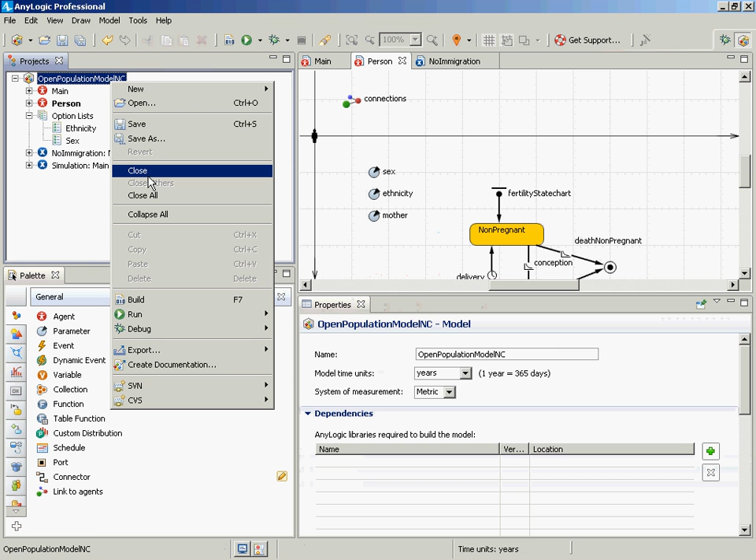Thank you for the question. If you go in here to the population, and look at the population statistics we've defined down here, those would apply only to people who are still in the population. If we wanted statistics that apply to everyone who ever existed, we would need to be more careful and walk over, collecting all the ancestry information. That's much rarer in my opinion, but it can be done.

You could return the reference to the mother and then- Oh, totally, exactly. You could walk the current population and go back and find their mothers and their mother's mother, and elicit the information that way. It wouldn't be very hard to do, but you'd want to be conscious that this is really what I want to do. By default, you're computing your statistics on the current population, and I think that matches 95% or more of the needs out there. You should be aware that if you're having these references intergeneration, unless you null them out when someone dies, they're going to be maintained even after death. Is that helpful? Yeah, okay.

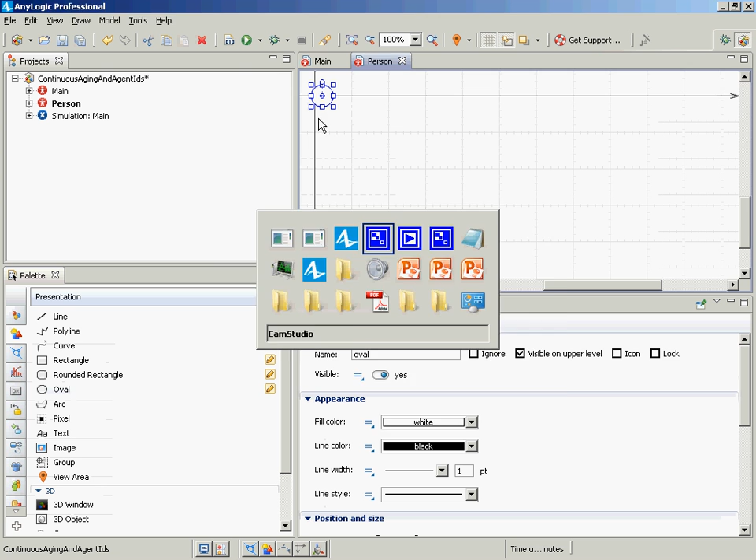I checked the model. All of the dead people are marked as root.population -1. Why don't we have -2, -3, -4? Oh, it's just a default designation. They're no longer in the population. How can we distinguish between dead people? Via the mechanism I'm about to show you.

They're so you're going to assign an ID. You could also test: is my mother the same as your mother? Even though they both have -1, we could test if they're equal to each other. But this will be assigning IDs, which will give them a unique ID that will be persistent. However long they're remembered, they'll have an ID, which is, I think, typically what we want.

And is it related to the memory that we assign to each person? For example, if it goes out of memory, is it going to delete it? Not unless those people would be eliminated. You would never see a reference to person minus one unless you're maintaining this connection, like we have a mother parameter, or a mother variable. That's when you'll see this, because the person's gone from the population. Normally, if people leave the population, you're not going to see any reference to them anymore.

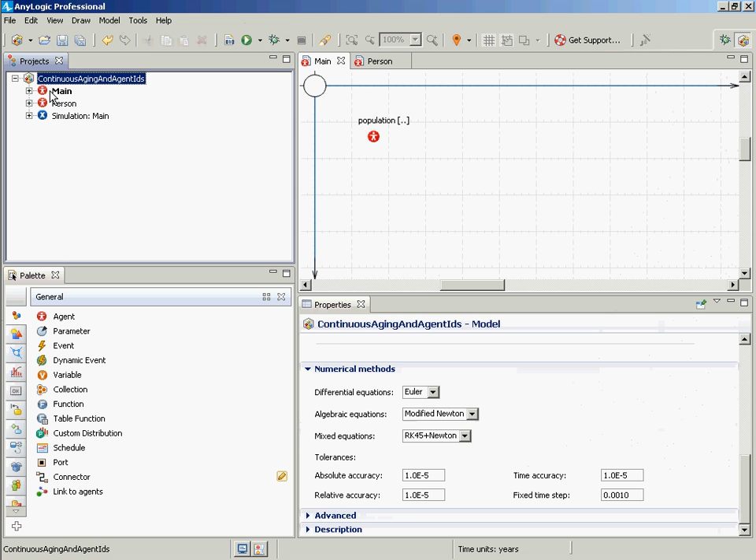So I think you were in here and you clicked this. Now it's working. You've got to be careful with this one, because sometimes it's not going to run the scenario you want. It could be that it didn't have any run recorded in there. If this is the first time you've run this model, it probably doesn't know what you want to run, because this is for running things as you've run them recently.

I would do this. I rarely use that button because it's confusing which one it's going to run. I think that's exactly what happened. So in any case, it seems a problem with knowing what to run and build rather than the model. Okay. So this is continuous age, folks. People are growing over age, and just to be clear about this.

Well, we'll take advantage of this more in some other models we may see. But suppose we were to want to add a state chart to someone where we wanted to have their mortality risk vary with age in a continuous fashion. We could have a state chart, mortality, right? Or state chart. It's not really mortality. It's state chart.

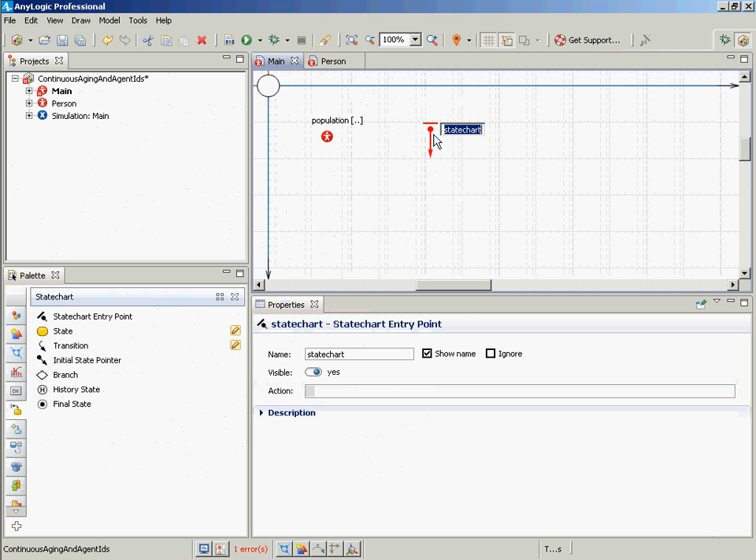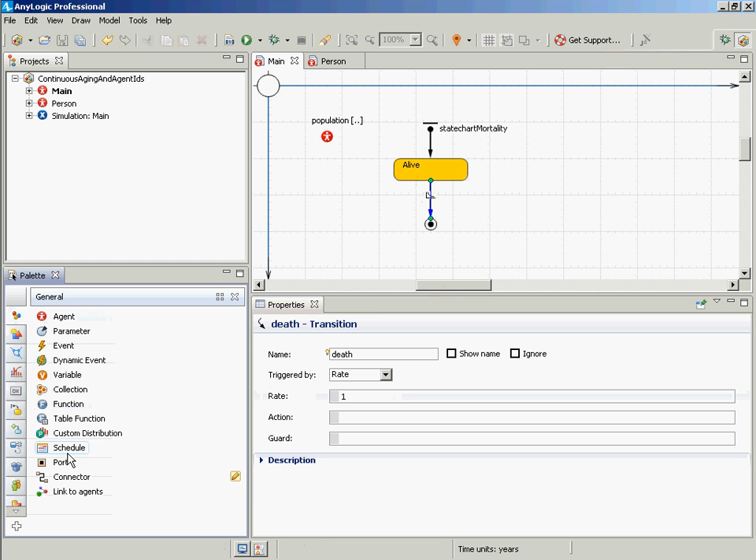Sort of life course, and this is alive, and then at some point there's a death transition, and here they have this continuous age, and we could define, if we wanted to do so, a so-called table function. This is a very useful thing. We're going to set this death transition to be a rate, and we're going to set the rate, the so-called hazard, the chance of dying, to be according to a table function based on their current age. So this would be mortality hazard, as we call it, the chance per year that someone will die, and we could define this in any number of different ways.

In this case, maybe for the youngest years in life, we have a 1 out of 1,000 chance per year of death, but then that actually lowers by age 1 because it's really the earliest years, and then maybe by age 10 it's also very, very small, and then by age 20 it rises. Think of those rambunctious years. By 35 it's gone down again. And maybe it remains down until 50 when it starts nudging up again, and then it works up its way till 70 maybe. I'm picking somewhat arbitrary values, but the idea is that we can have this mortality hazard, and it actually will graph it out for us here.

And this mortality hazard, we have all sorts of ways we could tell it. How do you interpolate it? Do you interpret it as sort of stepped values, or do you linearly interpolate it, or do you use a spline-based method, which has some nice theory behind it, and does a smoother interpolation according to polynomial fit? And then you say, how do I handle out of range things? Do I just use the nearest value? Do I extrapolate? Do I use some sort of custom strategy, treat it as an error?

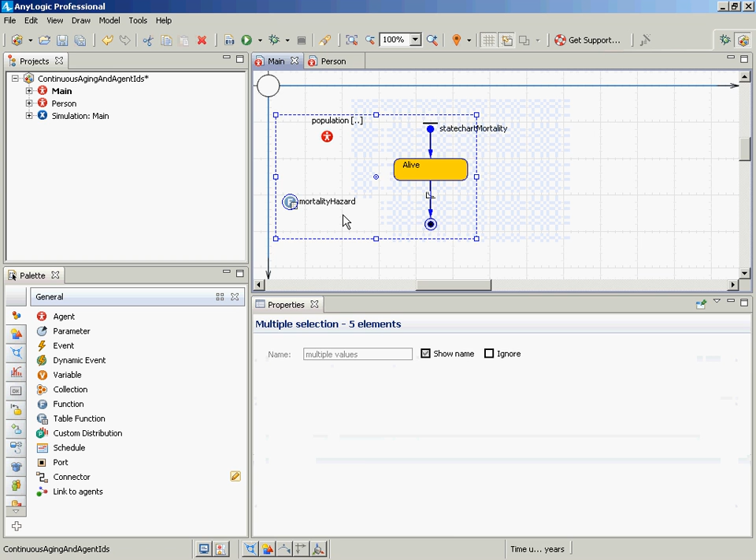Did I do a rookie mistake? I feel sorry. You know where I put these things? I put them in Main. They belong in Person. Sorry, folks. I just cut and I just paste them. What the heck? I was wondering what is going on here. Okay, so there we go.

The mortality hazard, well, that's a good question. Does that belong? It's not a parameter, so it causes less trouble than a parameter. With parameters, there's several reasons to put them in Main as opposed to Person. And I still vacillate as to where to put a given one. One of the arguments for putting a parameter in Main is if it doesn't differ between people, but that's just one of many. Another argument is that then you can set it from experiments. Another reason is you don't have to specify it every time you add someone to the population. And mortality hazard certainly is something shared between people, so that might suggest putting it in Main.

On the other hand, you don't have to worry about specifying it when you're adding people to the population, and it's something which causes in general less awkwardness if we keep it in Person. So I would tend to keep it together with Person. We also don't have to worry about specifying it from experiment. So in my view, it kind of belongs best with the person because it's about the person, or it's about people. You notice that you can set mortality hazard.

And they're growing older and older, but they're not being updated with the newer mortality hazards. So as they're aging, their chance of mortality is supposed to be rising, but it's not right now. Oh great, I left AnyLogic here. So it's not rising, and the reason is when they enter that state, that's when the mortality is determined for them, and nothing tells them something has changed at that point, that something has modified, recompute mortality.

If everyone started with age 0, no one would die at all because the mortality hazard is 0 for that, as in my latest update. So when they come in, their mortality hazard is determined and it's not being recomputed. If we wish it to be recomputed, we can do so by setting a transition that leaves this state and comes back in, and I'll go implement that. I'm going to double click on this here, and then drag it down here. Here we go.

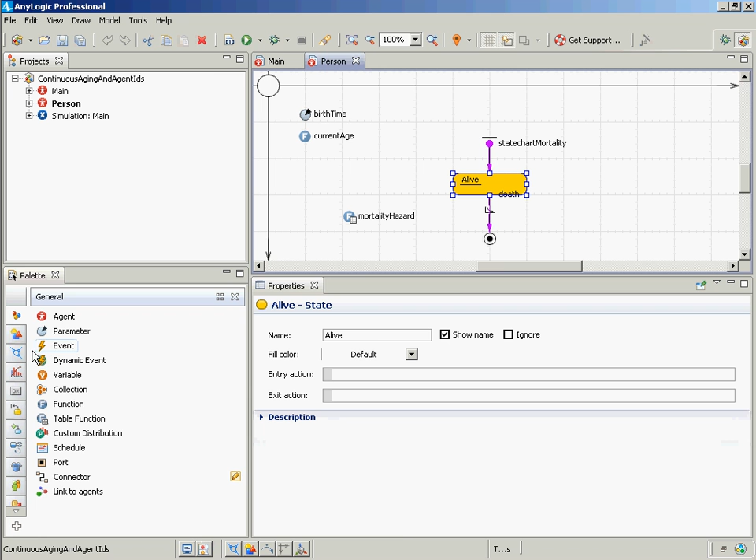We're going to set this to be going off at a timeout. Every 1 year, it'll recompute the mortality hazard, for example. So this would be called recompute mortality hazard. Okay, so even though continuous aging is going on, even though people have double precision age, and at any one time we may read the age off for someone in a continuous fashion, the mortality hazard is only being computed over time, being updated every year. So it's being updated once a year.

Okay. Oh, we didn't remove someone from the population when they die, so let's go do that. So in this death state, this final state, how can I remove the person from the population? Give me the formula. We just did this. Main dot remove_population. Okay. It's in the action associated. Oh, I'm doing it with the transition. I meant to do it with this state here. It's the action associated with the state. With this state down here. Okay. Remove population.

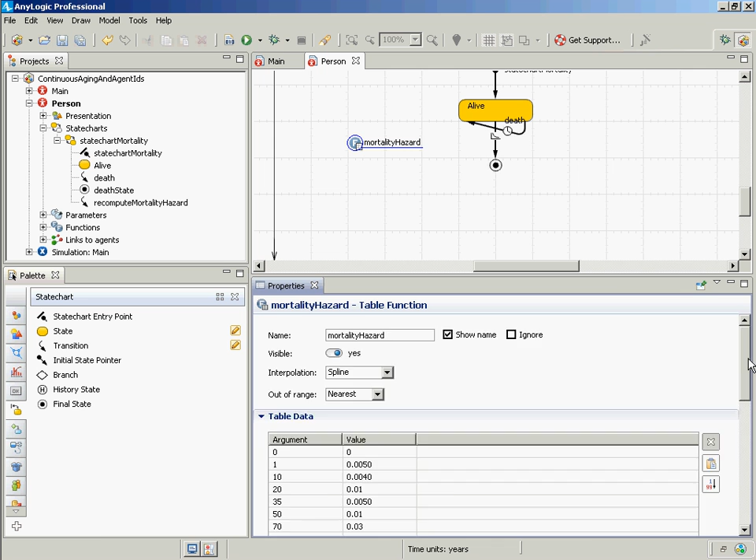Recompute their mortality hazard? It's a good question, but the question was, do you have to get it to first recompute their age and then the mortality hazard? This is the formula, the rate formula for this exit transition, this transition for mortality. And by coming back into this state, the rates and conditions associated with any transitions leaving this state will be recomputed, okay? When you come back into the state, those rates are recomputed. This is the formula for the rate. So it will call current age, get their current age, and it will apply the mortality hazard table function to look up for that age what's their risk of death per year. And it will then use that.

The update of the mortality hazard is only happening in the other transition. So why would it... Okay, so it's not named there, but this transition here that's shown looping back to alive leaves the state and comes back in. And it's when you come into a state that it's recomputing the rates for all of the transitions that leave that state. And so the rates specified for any transition which leave alive will be recomputed at that time, including this one that says death, this one that's highlighted here. And its rate will be given by this formula, and that formula is reevaluated at that time, okay? So it's recomputing it.

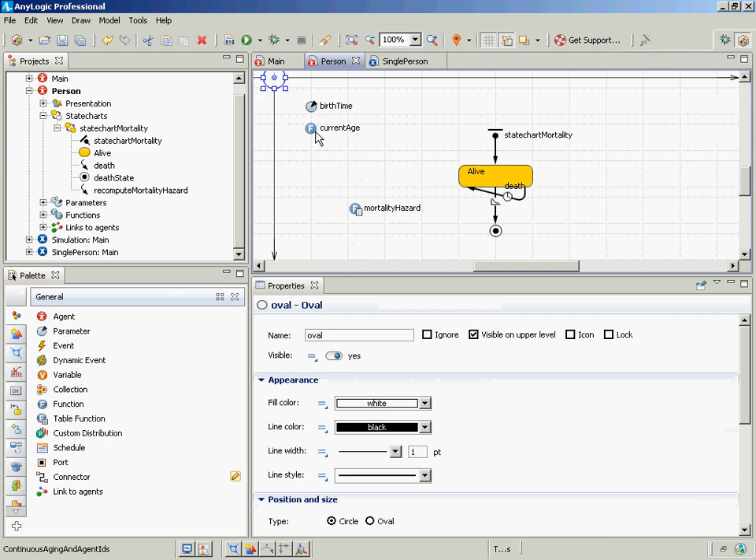This actually wouldn't be that helpful, but it'll illustrate the point. It's usually being called. Okay, it's being called over time at these times. Those times exactly.

Now, if I wanted to find out when this particular expression was being called, I could use a similar principle. I could actually have it call a function, and the function will return this thing, and it will further print out that information, right?

So why don't I say, I'm going to create a function called compute mortality hazard, and this is going to be a function. So in this transition, I could have something called compute mortality hazard. This is going to be a function, compute mortality hazard. It's going to return a value, which is a double.

And I'm going to call it from here. Hazard. Yeah. And it's going to return a double.

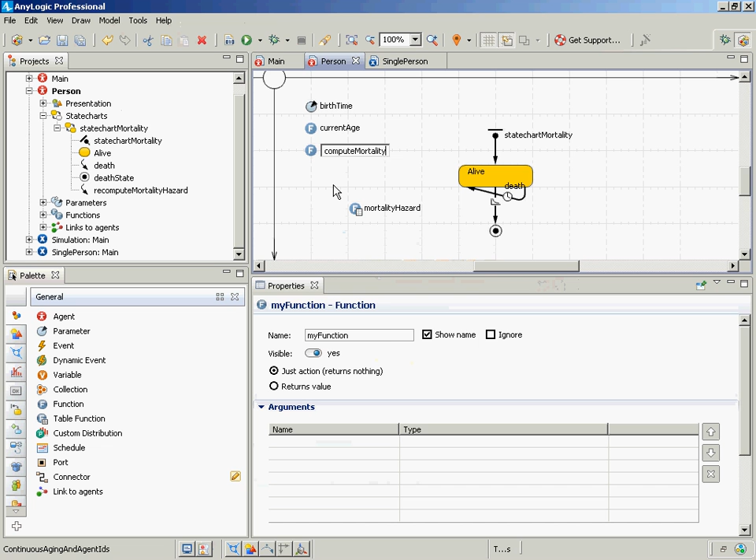And its job in life is just going to be to evaluate that expression that used to be here, but it's also going to print out when it was called. Trace ln, 'compute mortality hazard was called at time,' and I'm going to print out the time. This will tell me exactly when this is being recomputed, exactly at what point.

Okay, so this is a function. We just introduced a function. It returns a double, and we're calling it from here. What are we returning? We're returning the exact formula that used to be here.

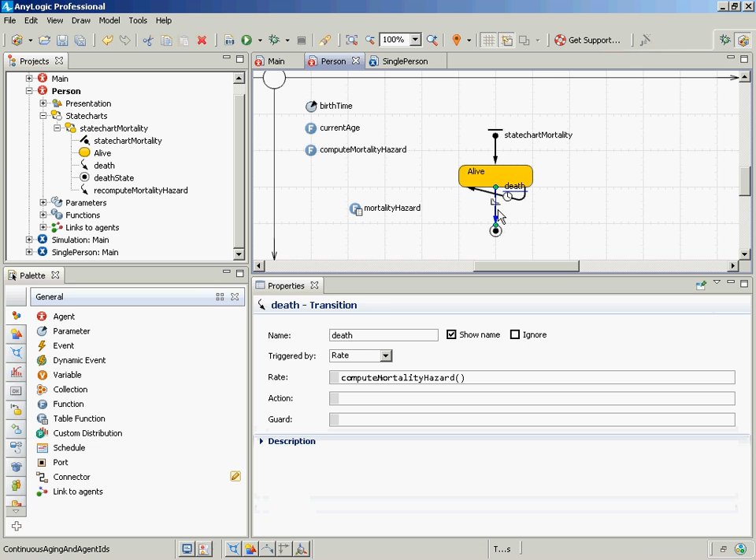Okay, so I'll put this thing here. This is what it prints out. Got it. And we can get rid of it at the other place? Right. We just call the function. It's returning that value, so all we have to do is call that function, okay?

So, folks, to be clear here, this is a trick to observe when it's recomputing this. So it'll print out, it will tell us when this is being recomputed. It's going to compute the mortality, calling this function called compute mortality hazard. This function is returning a value, that's all it does. It's going to return that value, which is the original value that was here, but it's also going to print out something that says 'I was called at this certain time.'

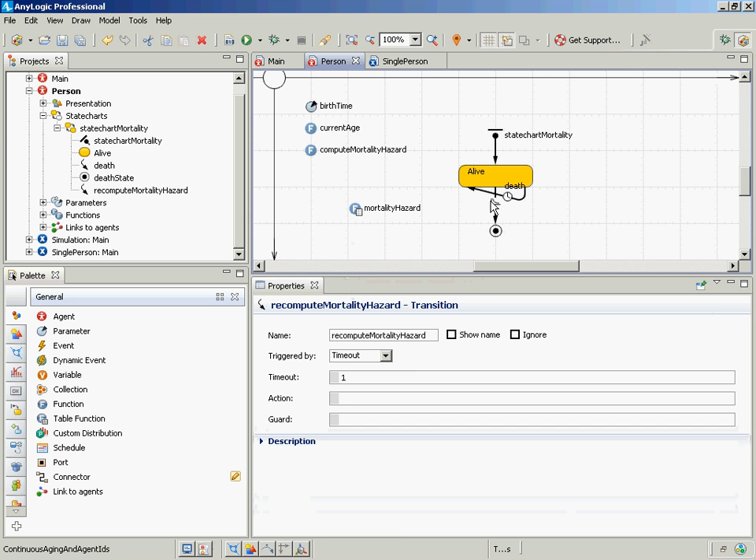Yeah, so I think I did something wrong. The current age is undefined in type person. It worked before, but I did something just now that screwed it up. So basically what I did was I put here, and then I deleted the rate there, but then over here is where I now... okay, let me come around here.

Okay, so current age is not being defined. Current age is there, but I think it's spelled with a lowercase a here. It needs an uppercase A. This is just a typo. Got it. So make it current age in the other place too.

Okay, it should be gone elsewhere now, right? Okay, it says cannot convert from null to double. So what's going on here? Oh, you need to have the rate. You need to do compute mortality hazard.

Not down here in the action, not down there. Okay, and does it have a semicolon at the end? No, okay, it's just a value. Got it, okay, thank you.

Okay, would you like help? Yes, okay great. Right, compute mortality hazard. Okay, so what you actually just want is compute mortality hazard like that. And then you're done with it.

Yes. Yeah, sure, it's this. Okay, so folks, this is to answer.

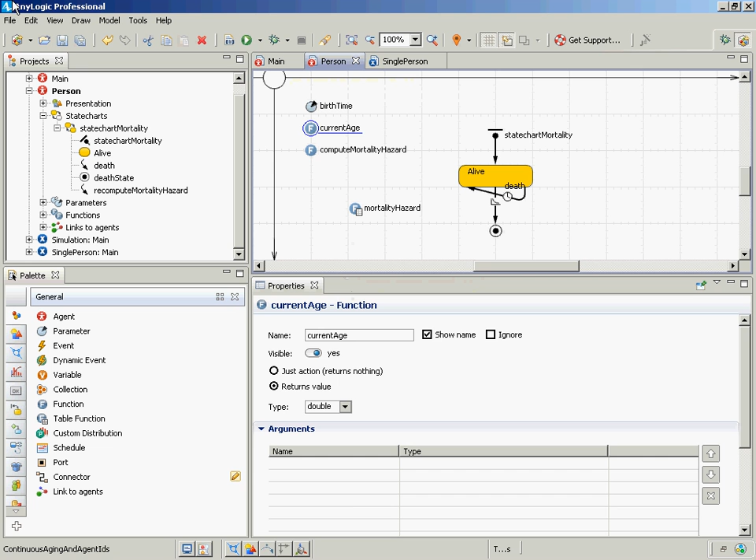So compute mortality hazard is being called at time 5. It's being called at time 4. It's being called at time 3.

So current age here is also printing things out. We don't need it to print things out anymore, that was just an illustration. So if we comment this printout from current age out, it may be clearer. Current age doesn't need to print anything anymore, it's only compute mortality hazard.

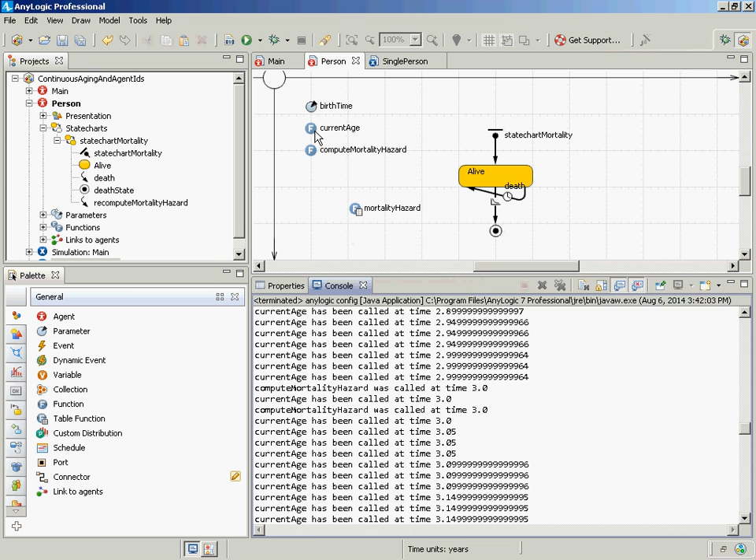Slash in front of it, it's just like on the screen here. It's being called from this transition for the rate. Right.

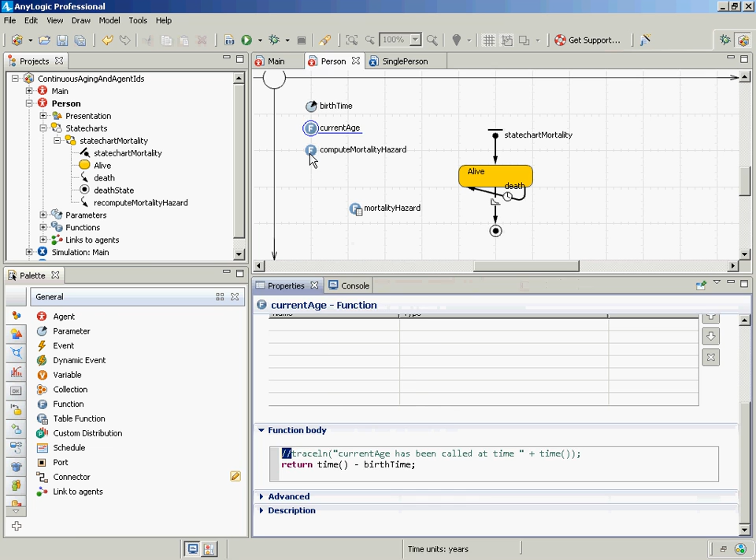Okay folks, so what's happening is Maria raised the question: when is this transition being updated? And I said this transition is being updated when this other transition is being taken, because you're coming back into the state. And when you come back into a state, all the transitions out are being recomputed. So my goal here was to show exactly when this transition is being recomputed.

What times? Because I wanted to see when it's updating its mortality hazard based on someone's age. After all, we have people's age changing continuously here, and the question is, when does it really notice that in terms of updating the mortality hazard?

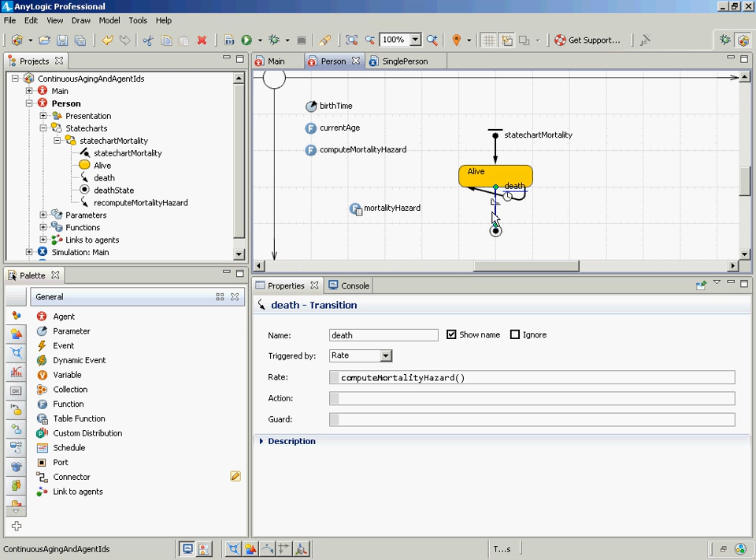So what we did, to figure out when this rate was being recomputed, we have this expression for rate here. And so I said, rather than just computing the expression directly, looking up in mortality hazard, let's call a function. This function will look it up and return the right value, but in the meantime it will print something out saying 'I've been called.' And every time it says that, we know it's been recomputed, we know it's recalculating the rate. And when I run this, what we'll find is that rate is recalculated at exactly these integer times, these are the times where this other transition is going off.

You're calling it twice in every year, right? It's being called twice in each year, yes. Now, why it's being called exactly twice, I'm a little bit unclear.

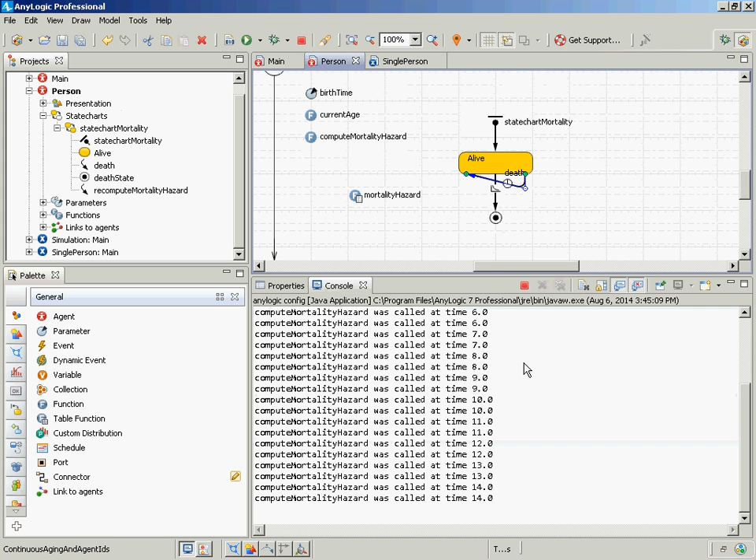When I turn that transition off, I think what's happening is it leaves and it's recomputing it then, and you come back in. But the point is, if we didn't leave this state at all, if we eliminated this, when would it be recomputed? If we just had this, when would it be computed? First time they enter. And from then on, their mortality hazard will be the same. They're aging, but it's not recomputing their updated risks.

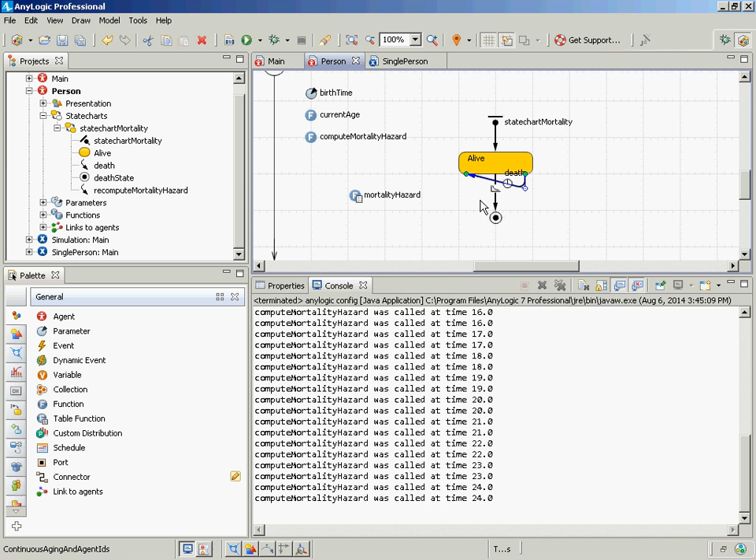Let's try it inside. I've tested in previous versions of AnyLogic, and it didn't work then. But things change, and let's try that. Single person. This is an inside transition. Oh, it is working. Nice. It's only doing it once. That's interesting. Yeah, it's only doing it once. That's a great discovery. Wonderful. Okay.

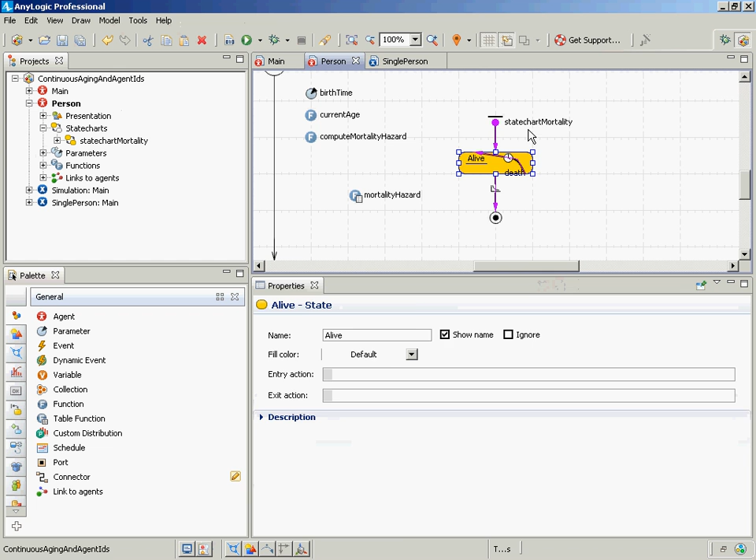Suppose we wanted to update the mortality hazard, suppose we wanted to update the hazard that is known to obtain for people every 3 months. How do we do that? Yeah, we'd set the timeout associated with this transition to be 3 times month, right? So every 3 months, it will recompute this mortality hazard. And I know this seems like a strange thing. I mean, we define this function, and we get the function to report.

Whoa. Okay, now that's interesting. I did a timeout of 3. Oh, well, of course, right. It's not going to be, it's going to be much more frequent and not necessarily on year boundaries, right? Okay. So now it's computing approximately 4 times a year, right? 1, 2, 3, 4. 1, 2, 3, 4.

I want to apologize if this was confusing to people. I want to make a few very high-level points. This is all an exercise to capture the fact that we could capture continuous aging. We could capture the fact that people age over time in a continuous fashion. We don't have to just divide people up into age categories, or only integer ages and update for everyone what their age is on a regular basis. Instead, people could just report their current age upon demand, saying I am 23.35926 years old. Whenever needed, I can ask for someone's age. That's useful when we want to slice and dice the population according to age in very fine categories.

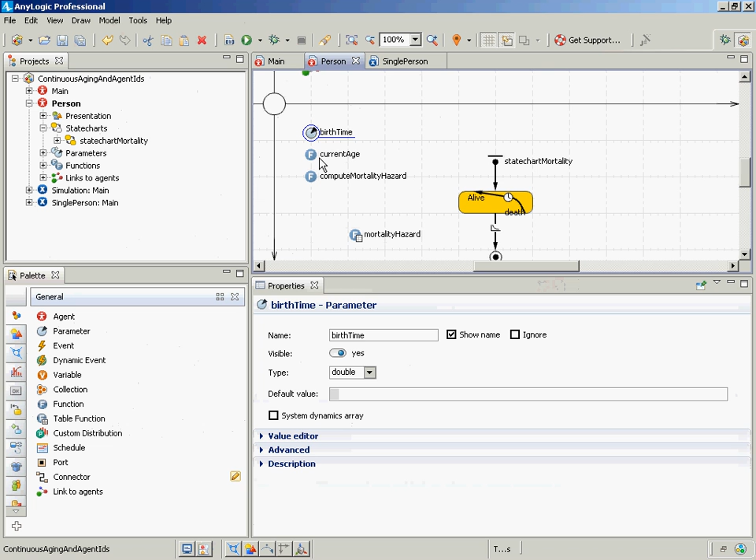But there's an issue that comes up with that, and I tried to deal with it here. There's a risk, a hazard that comes up with it, and that is that if you are setting values for rates of transition that depend on your age, and this is being updated conceptually all the time, then it's not going to automatically recompute your rates. If we eliminated this altogether, what would happen? It's only going to calculate it at the very first time in the model. And your initial age is going to dictate your mortality hazard then, and that's what's going to apply for the balance of your life, which is not what we want. So to get what we wanted, we introduced this sort of transition.

And initially I thought it had to go outside, and actually in AnyLogic 7 it seems it's perfectly happy going inside, and it has some salutary benefits. And I thank Maria for asking about that. But there was still the unsettling question - well, I think this is how it's going, but what is it actually doing? What is this model actually doing in terms of when is it recomputing this rate?

And my point is, you don't have to leave that up to chance. You don't have to leave it to guesswork. You don't have to leave it to going through the manuals or watching videos online. Instead, you can get it to tell you when it's recomputing it. How do you get it to tell you? Instead of putting a hazard in here based on some expression, you call a function. Why do we call a function? What does a function have to do with it? Because a function can return the right value, and that's great, but it can also print something out at the same time.

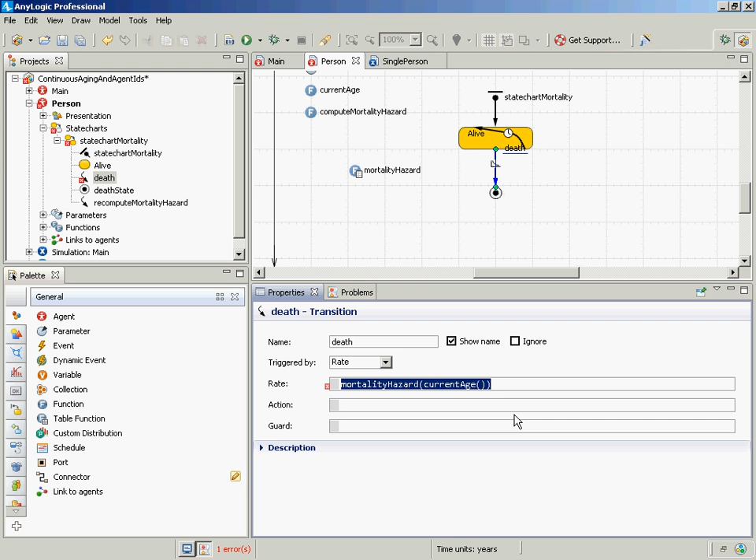It will be printing out here, telling me precisely when it's calculated, and that's in my favor. I want to know when this is being recomputed. At what point is it really calculating this rate, and to what degree is it just using the value it had originally?

And I can find out - right now it's computing every 3 months. If I remove this, it's computing just a single time. That's not what I want. That would imply people have the same risk - they come into the world at the beginning state of the model and have the same risk from then on. That's not what we want.

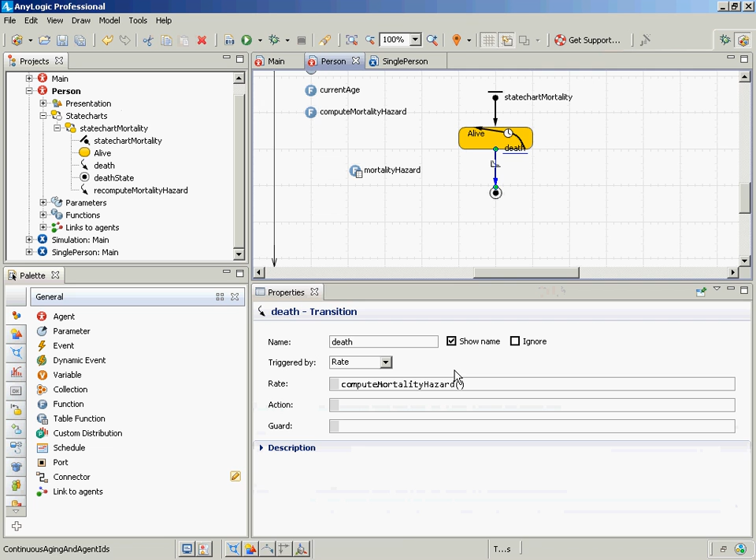We want their risk of dying to change as they age. This is the way we get it, by a self-transition like that, and we set the rate of that transition to reflect how frequently we want things to happen in the model. Does that make sense? Okay, yeah.

Yeah, the birth time, yeah. Okay, so the idea here with birth time - thank you for the question. The question was, there's this birth time parameter, what does that have to do with time of birth?

So some of you are from a health science background, and you know that if you work with data... We work with large-scale provincial databases on diabetes and end-stage renal disease. We get data from our Ministry of Health across the population on when people got diabetes and when they were diagnosed with diabetes and with end-stage renal disease. We can ask for data of that sort in two forms: their birth year and then the year at which they got diabetes, and the year at which they were diagnosed with end-stage renal disease. That allows us to compute their age at which they got them.

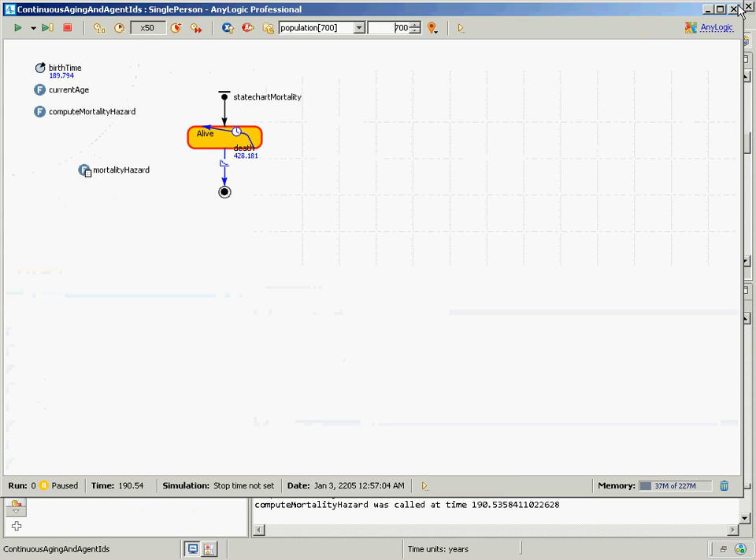Apologies for the confusion, but I want to use this model to finish off, and we can do this in less than 5 minutes. Maria's question, where is the ID? People's names seem to be ephemeral. People come into the population, disappear from the population. Who is population member 200 will be changing all the time. How do we give people a persistent identifier? Let's do that. This will be the final thing for the morning, and then we'll break for a much-needed lunch.

Okay, so go to person, and we're going to do something you probably haven't seen before. And this, too, will stretch you. We've added functions now. Functions return values, they print things out, and hopefully that's new to most of you. Let's add a new variable in, and this is going to be called ID. It's interesting, it's not a parameter, it's a variable.

I'm just thinking there's 2 different ways I could do it. I actually think it would be cleaner. I'm going to delete that variable, and I'm going to do it as a parameter, okay? And I'm going to actually make this a separate nugget. So this was sort of continuous aging, and this is going to be a separate little video.